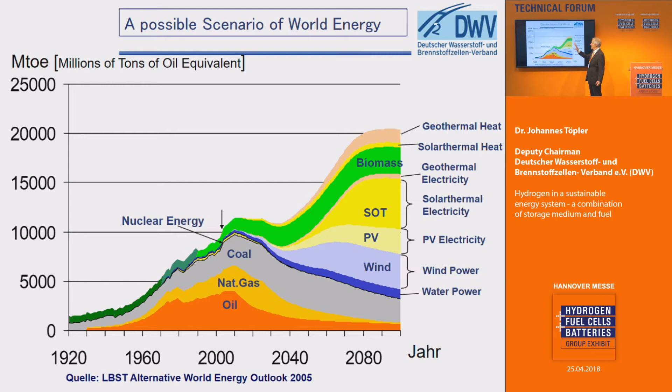And in future we will have more and more wind, photovoltaics, solar thermal energy, biomass, geothermal energy, and so on. And the most important difference between the conventional energies and the new ones is that in the past the energy was concentrated in matter, in oil, coal, gas, and from this fuel-based energy system we had to produce electricity.

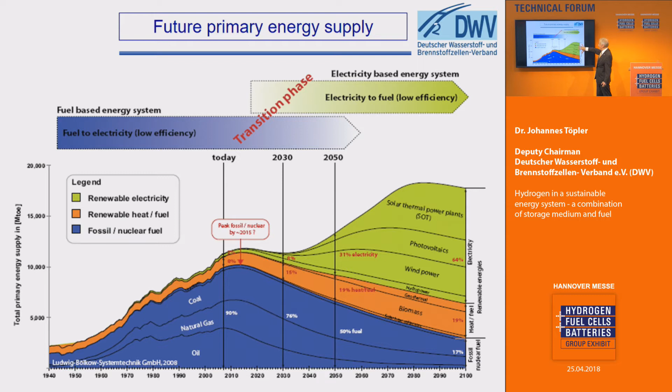In future we will have, for example, wind power, photovoltaics, solar thermal energy, and from this the first step to energy which can be used for technical purposes is electricity. That means we will have a strategic transition from a fuel-based energy system to an electricity-based energy system. That's a very important strategic step, and now we have to look at how the electric energy from these sources will be available.

And here you find an example of the power distribution in the E.ON grid over 10 days in March 2007, and you see here the power distribution in the electrical grid from wind energy. And in Germany we have the legislative situation that this power should be multiplied by a factor of 3 by 2020, and we have reached this power distribution right now a little bit earlier.

And you see here the distribution in these 10 days with actual power exploitation. And the vertical load in the network was the brown line, this one. And you see here that in these days the demand could not be satisfied by the supply by far. There is a factor of more than 5. And here are some other days, 2 days, where the supply outreaches the demand by far.

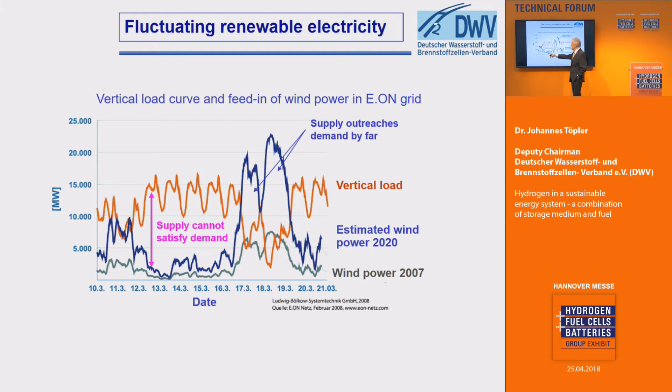And this means that we have to store the additional energy of these days to have it available, for example, on days when we do not have enough wind energy. This fact is well known. But you have to look at the scale. We have here around 5,000 megawatts, that means 5 gigawatts, and this gap in between is around 10 to 12 gigawatts. And 10 to 12 gigawatts for 4 days, for example, 100 hours, is 1 terawatt hour.

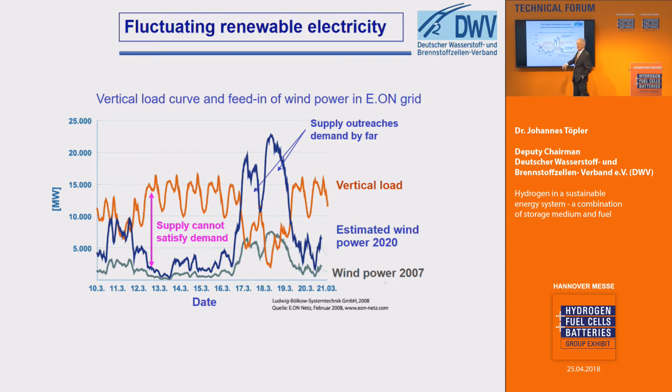That means for situations which can be described, for example, in this manner, we have to store around 1 terawatt hour. It's a very, very big energy amount. For example, if you pay 30 cents for 1 kilowatt hour, then with 1 terawatt hour we are discussing about 300 million euros. And as one example, I will show you that this amount of energy can be stored in hydrogen.

The first example of a closed cycle energy supply is shown here. We have electricity from wind energy. Photovoltaics is also possible. We have electricity, and this can be distributed directly. And we can supply the electricity directly to battery-driven electric vehicles. If we have more electricity available than can be used directly, we can produce hydrogen via electrolysis. How it works, you have seen in the last contribution.

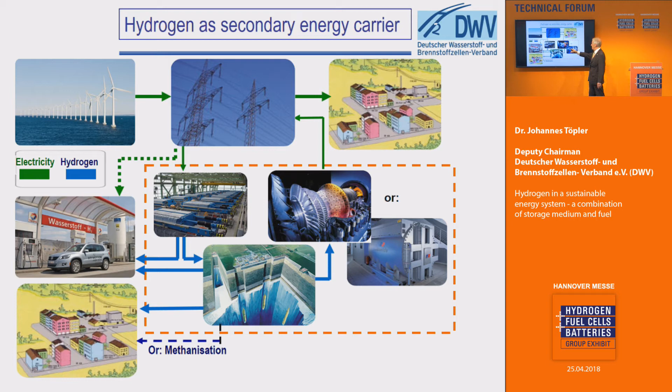And this hydrogen can be delivered directly to fuel stations for electric vehicles driven by hydrogen with fuel cells. And it can be stored in very, very big caverns. And from here, the fuel station can be supplied, or via gas networks, households and industry can be supplied with hydrogen as an energy carrier. And this hydrogen can again be re-electrified for the electric grid by fuel cells or even by turbines.

And now, once again, the size of the storage system. We have in Germany some pumped storage systems, and we need them very urgently for the stabilization of the 50 Hertz frequency of the network.

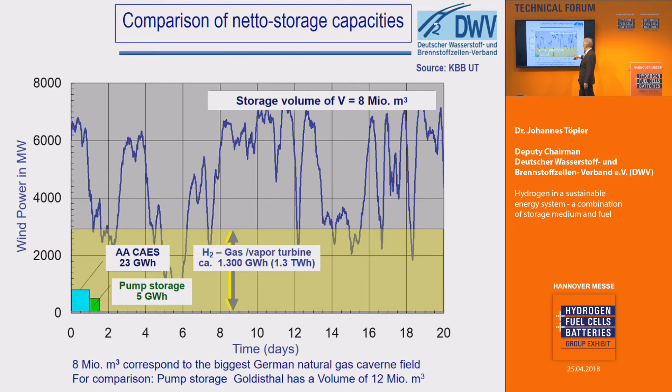And in this case, we have round about 1 gigawatt in general and 5 gigawatt hours for energy. We have adiabatic compressed air systems with an energy content of round about 23 gigawatt hours and round about 2 gigawatt electric power. But for hydrogen, we need round about terawatt hours to compensate energy gaps of round about 4 days with up to 10 gigawatts. And this storage system, or this amount of stored energy, can only be supplied by hydrogen.

The reason is, in hydrogen we store chemical energy, or the energy of a chemical reaction. We have 280 kilowatt hours per cubic meter in hydrogen compressed with round about 120 bars. And this is a net hydrogen storage. And if we subtract the energy loss for electrolysis and fuel cells for re-electrification, we have round about 170 kilowatt hours per cubic meter. In comparison, for pumped hydro systems, it's 0.7 kilowatt hours per cubic meter, or for adiabatic compressed air systems,

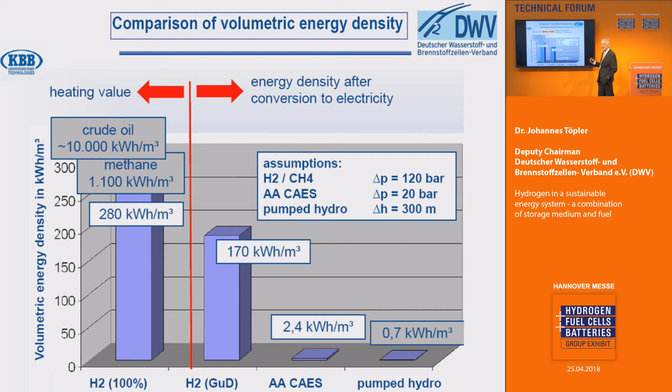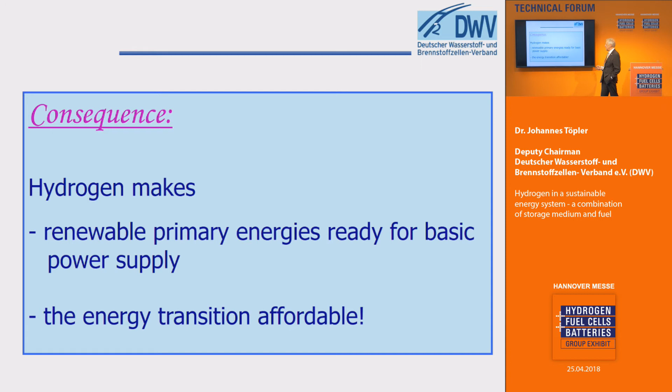On the other hand, we can use fuel cells for mobility, for example in motor cars, buses, trucks and so on. You see several cars, for example from Daimler, at the booth of NOW. The transportation systems are the storage tanks with compressed hydrogen. You see some samples today here at the fair. We have an additional battery. I will tell you the reason a little bit later. We have here the fuel cell stack, the supply system and the electric engine.

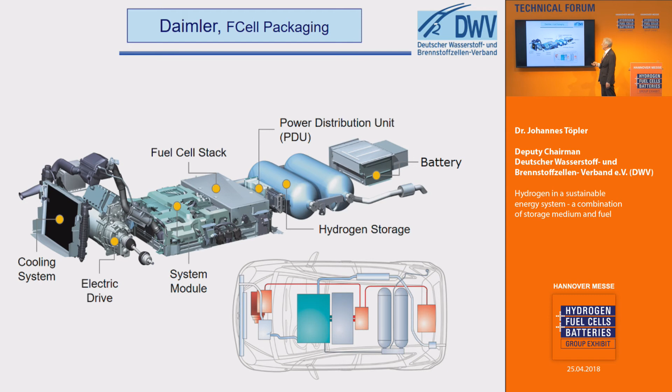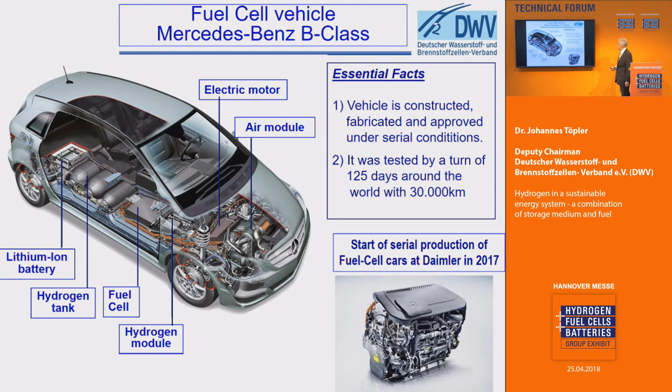And with a car of this type, Daimler B-Class, the most impressive test was done several years ago. It was tested by a turn around the world in 125 days with 30,000 kilometers. It was related to the 125th birthday of Daimler. And the test of these cars has shown that it is possible to construct and to operate these cars under serial conditions. And the absolutely new engine of this system is shown here, and it is built in the Daimler car, the GLC, which is shown here today at this fair.

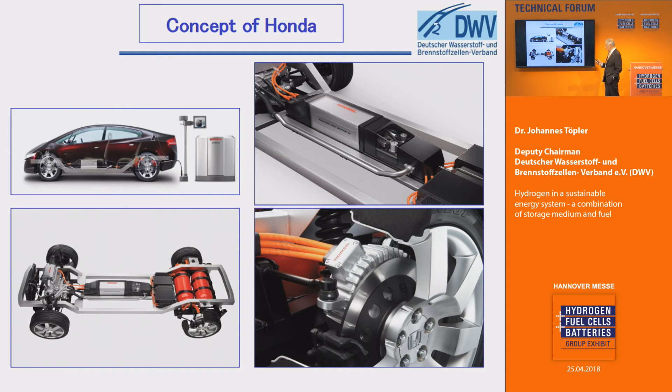Other car manufacturers have other systems. For example, in the case of Honda, it's a four-wheel drive, one drive at the front axle, a wheel hub drive at the rear axle. Even this four-wheel drive system is in operation. And one of the most impressive cars and the first in serial production was the Mirai with a similar packaging. It's similar to the Daimler system, but it was the first one in serial market penetration.

And one comparison to battery-driven cars. Even fuel cell-driven cars have an additional battery. We need the battery for this. I will tell you why. But one comparison, for example, for the range of the cars. In the case of a gasoline car, you see here only the gasoline. Here is a typical chemical formula for this, to be transported and stored within the car. Oxygen is withdrawn from air, and carbon dioxide and water vapor as chemical combustion products are released to air as well. In the case of a hydrogen car, we need the hydrogen on board the car as stored energy, and oxygen is withdrawn from the atmosphere, and water vapor is released via the exhaust system.

In a battery-driven vehicle, for each electron, you have stored on board the anode material and the additional cathode material, for example, with big molecules for each single electron. Here you see the summary formula. And if you want to construct the vehicle for a long distance, for example, for a doubled distance, you need a doubled diesel or gasoline tank, you need a doubled hydrogen tank, or you need a doubled battery. That means in the case of a battery-driven car for long distances, you need a lot of battery weight. For example, in the Tesla, more than 600 kilograms.

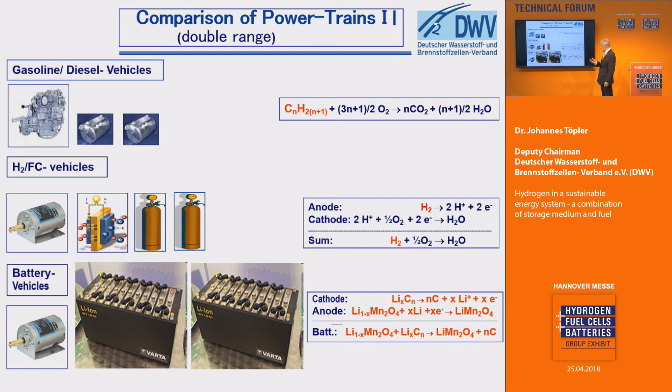On the other hand, an additional battery is very suitable for a hydrogen-driven car, because you can make the hydrogen system smaller. For example, for peak loads, and you can use the battery as energy storage for reusing the braking energy. For this case, you have here a generator instead of a motor, and the generated electricity can be stored in the battery.

And the third reason is you have an additional heating system, even for preheating the non-operated car. In the case that you want to start a car in very cold weather, you can start the fuel cell producing electricity, not for driving but for filling the battery. You can get heat for preheating the car, and when you drive, you can drive with electricity from battery and fuel cell in the same way.

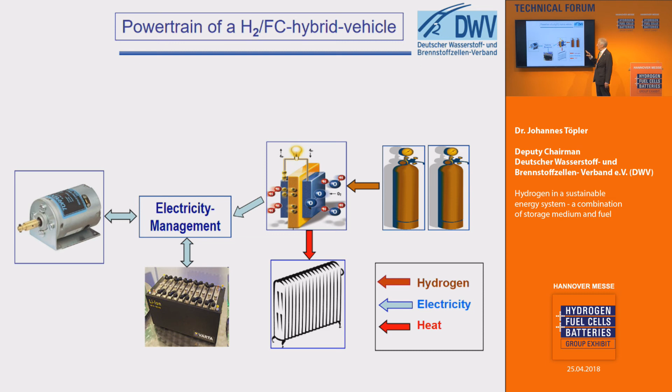You can use, when driving, the waste heat from fuel cell, and if you reach your goal, the battery should be somehow empty, and you can refill with preheating again for the next start. That means you can heat and preheat your car without loss of range.

And some years ago, 2 or 3 years ago, a lot of companies in Europe investigated exactly which market penetration for which type of cars is more suitable for battery vehicles and for fuel cell vehicles. And the result was that in compact and medium classes with ranges up to 20,000 kilometers per year, that means in this triangle, battery vehicles have advantages. And in this area, bigger cars and bigger ranges, fuel cell vehicles with hybridization have advantages.

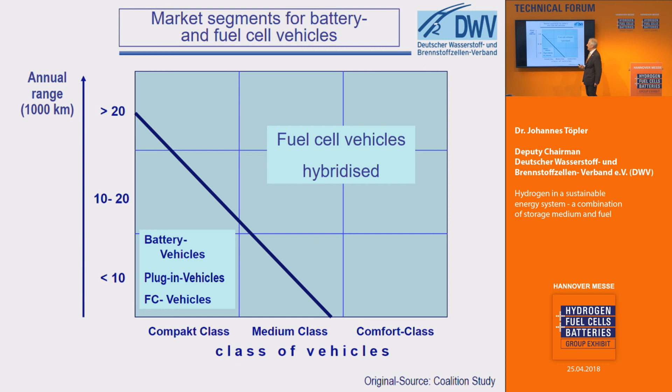In the last years, it was reported that batteries have got a lot of additional advantages. Maybe the result is that this line can be shifted a little bit in this direction, but for these cars and additionally for transporters, for delivery vans and so on, we have a lot of advantages for fuel cell vehicles.

And one other point was discussed in the last years. That was the so-called methanization via Sabatier process, so that we can make from stored hydrogen synthetic natural gas and use this in cars as well. But we have to look very exactly at what we do.

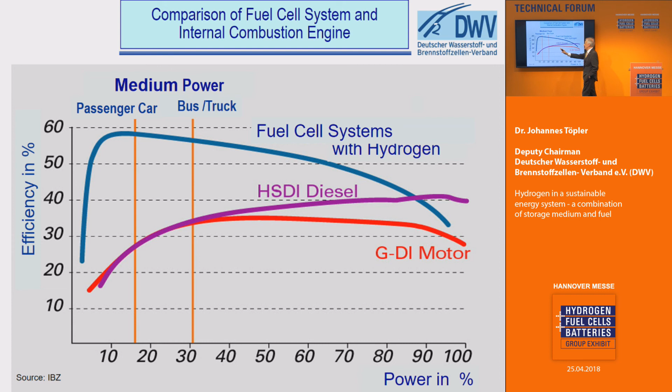If we have, for example, biomass, in this case we have to use combustion engines, and combustion engines have efficiencies like this. That means for high load, the efficiency is similarly high as the efficiency of fuel cells. That's the efficiency of a fuel cell system. And in this case, we see that we have advantages, for example, for biodiesel cars in the range of high load. Normal passenger cars or common buses have advantages in this area. That means generally with fuel cells.

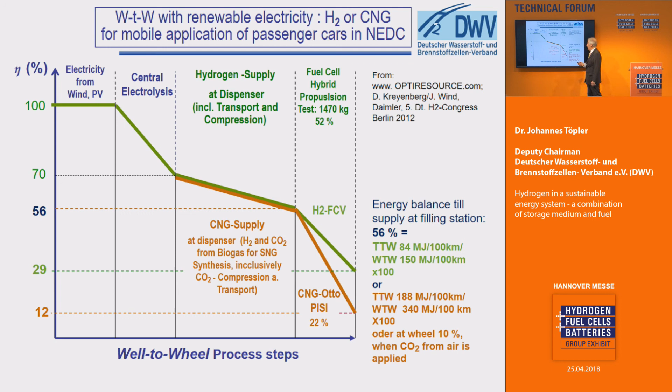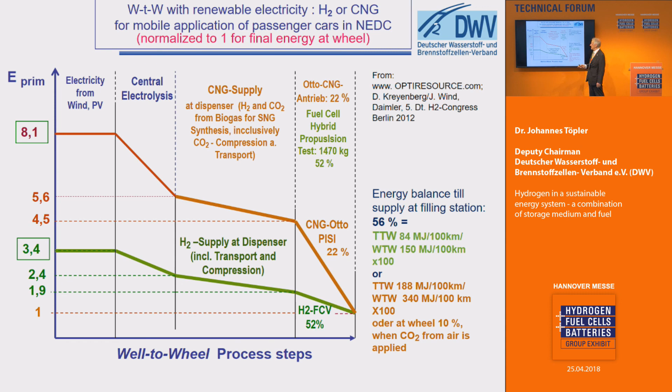And if we look at the energy chain from the opposite side and we normalize the necessary energy at the end, at the wheel, and we go back to the necessary energy input, we see that the size of the power plants at the beginning of the whole chain is here around a factor of 2.5 higher. That means the investment cost for producing the energy or the power equipment is higher as well.

You can look at the different energy chains for yourself in the OptiResource program from Daimler. Look on the internet for Daimler and OptiResource. You can look at the efficiencies and the carbon dioxide emissions directly for all steps, and you will find the emissions by energy and the emissions for carbon dioxide as well.